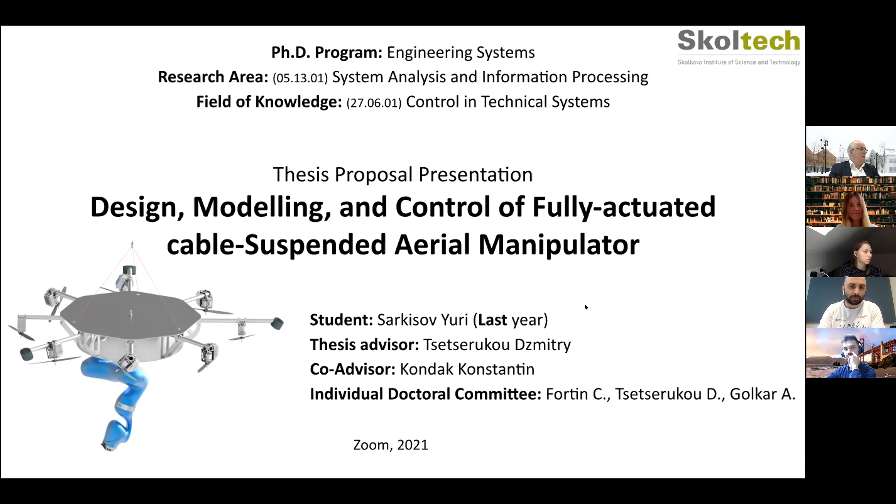So hello, my name is Sarkisov Yuri. I am a last year PhD student in engineering systems. My thesis proposal we will discuss today, and the topic is design, modeling, and control of a fully actuated cable suspended aerial manipulator. The presentation contains 2 main blocks. First, we will discuss questions related to the existing solutions. In particular, we will discuss the problem itself, research question, reference model, and relevant areas. And in the second block, we will discuss my approach and hopefully the impact it will make on this field. And in the end, I will conclude the presentation.

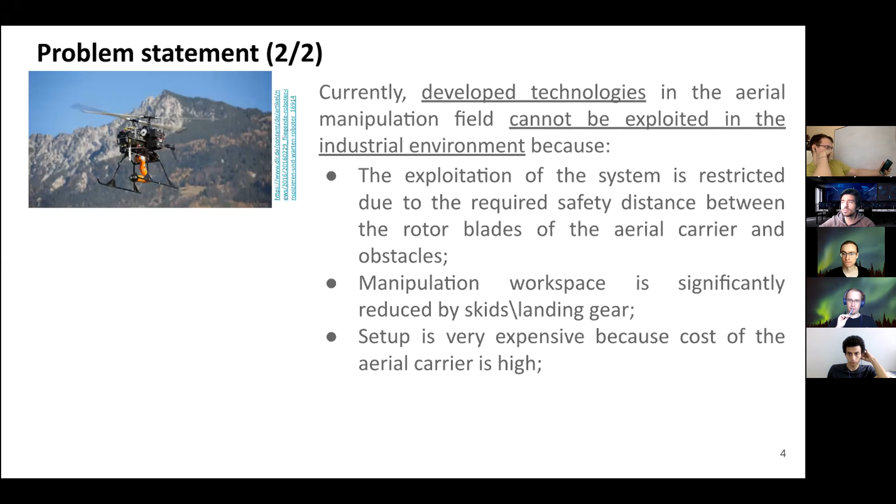And in order to solve this issue, there are different prototypes developed in the field of aerial manipulation. Let's have a look at them. First, it's this autonomous helicopter with an attached robotic arm. It has a couple of drawbacks. First of all, exploitation of such a system is restricted due to the required safety distance between the rotor blades, the diameter of which is 4 meters, and obstacles of the environment in which it operates. Secondly, the manipulation workspace is super restricted because of the skids of the helicopter. And lastly, the setup itself is very expensive because a middle scale autonomous helicopter costs a lot.

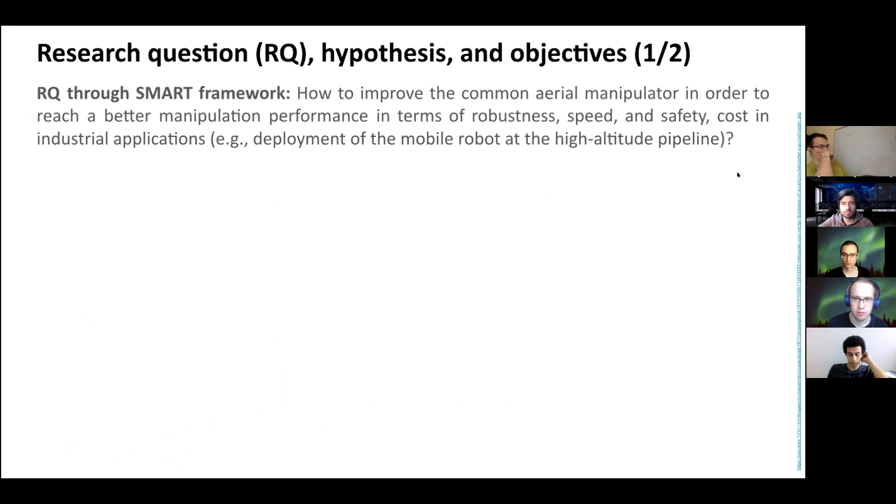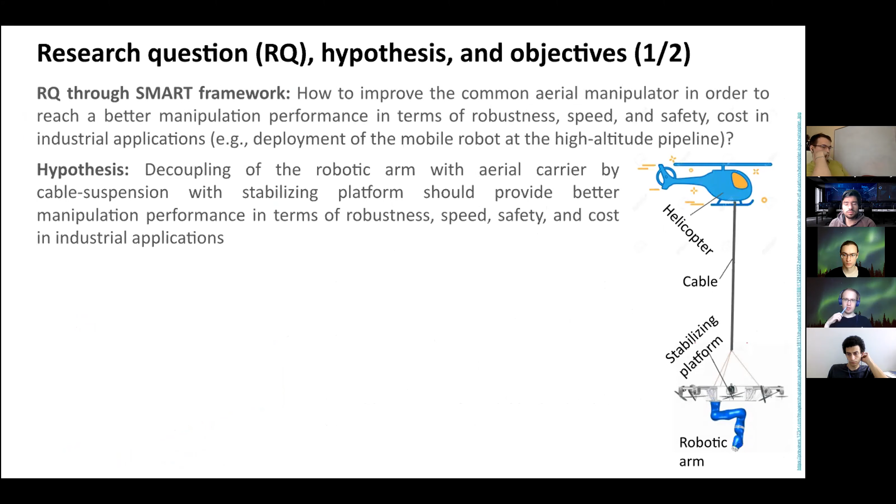And to this end, I would like to formulate my research question as follows. How to improve the common aerial manipulator in order to reach better manipulation performance in terms of robustness, speed, safety, and cost in industrial application, on the example of deployment of a mobile robot at a high altitude pipeline. And my hypothesis here is that the solution might be decoupling the robotic arm from the aerial carrier by cable suspension with some stabilizing platform, which should provide better manipulation performance in terms of the parameters I mentioned above. And there are several research sub-questions. They are mostly technical and related to how to model, how to control, how to develop, how to design such a system.

Yeah, and I would like to define several research objectives. First is to develop, investigate, and test performance of such a system, relating to certain requirements which are compliant under industrial conditions. Secondly, to model, simulate, and design a control system for certain technical conditions. Then, to compensate for both static and dynamic disturbances by separated actuation systems in some smart, coordinated, centralized way. Lastly, to analyze and compare performance of the received solution with the existing one.

Okay, my reference model, modified from my experience, will look like the following. I define the key factor as the reachable complexity of the task. As I mentioned above, there's interaction, and we would like to operate with manipulation capabilities.

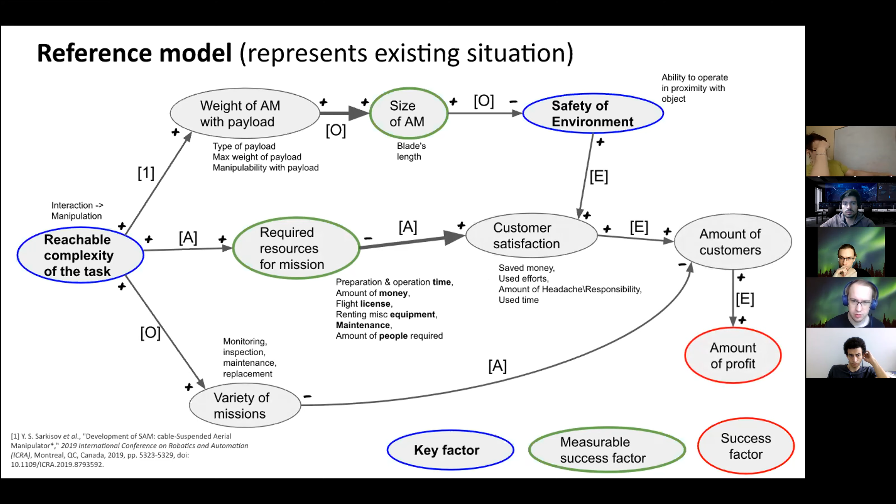As a recommendation from Clement and Nastya, I might replace the marketing part with something we'll call effectiveness of the robot, which is more technical in my case. But in the end, it's about total performance of the system.

Okay, let's discuss the relevant areas. My research is on the border of different disciplines. First of all, there's control strategies, which include different model predictive, adaptive, nonlinear control approaches. Secondly, it's design and development of the systems. Thirdly, it's aerial manipulation itself, because the approach I propose is a type of aerial manipulator. And lastly, there are some connected topics which are similar but not exactly the same.

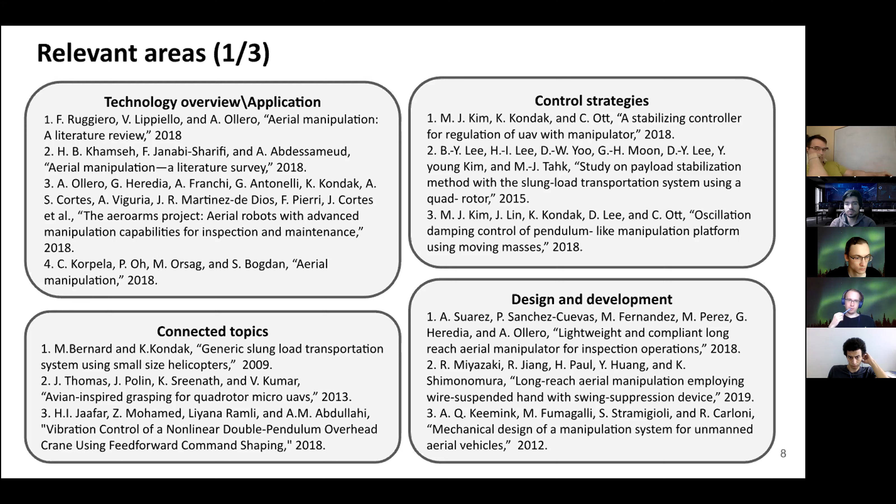For example, slung load transportation by some aerial vehicle. Let's speak about manipulation a bit. There's interaction as a general task, and as a part of interaction, we can define manipulation. Manipulation can be fixed base, like industrial robots, or floating base. Floating base manipulation at the Earth environment versus gravity, we call aerial manipulation.

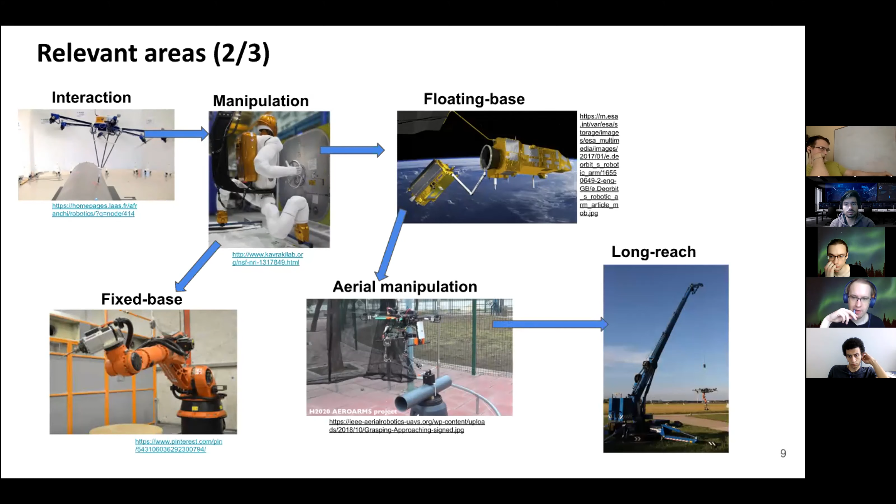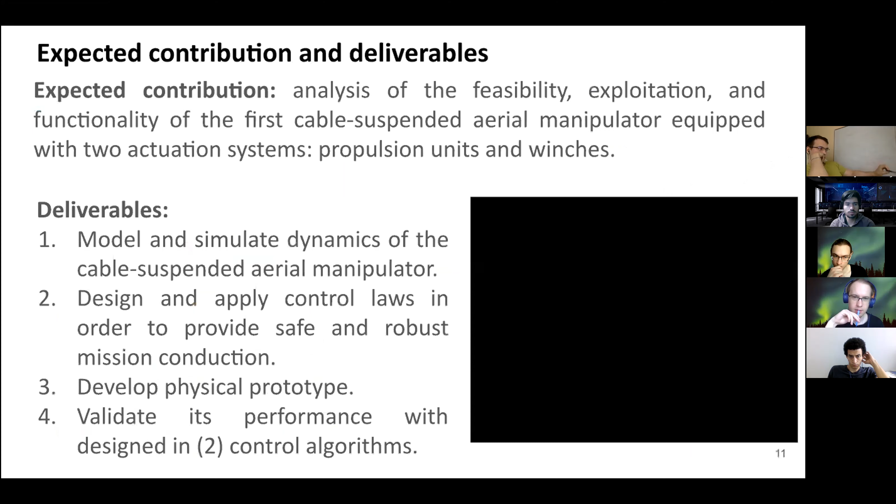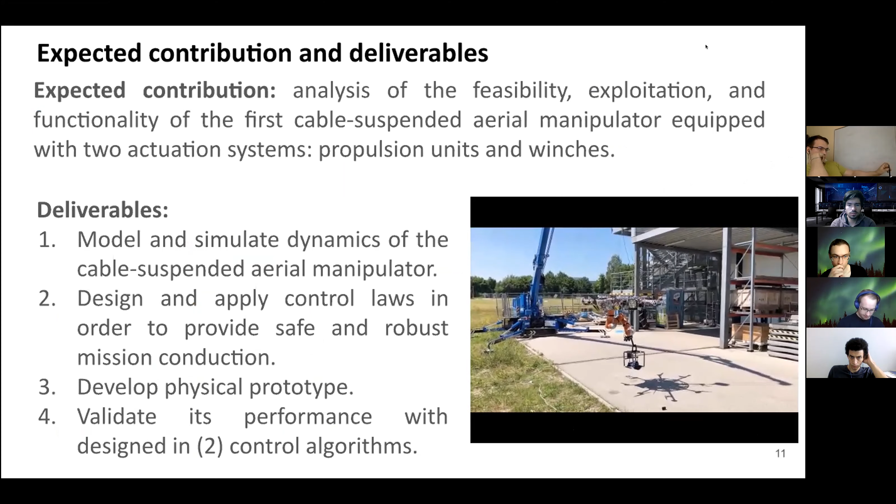The expected contribution of this work will be the following: analysis of the feasibility, exploitation, and functionality of the cable suspended aerial manipulator equipped with two actuation systems, propulsion units, and winches.

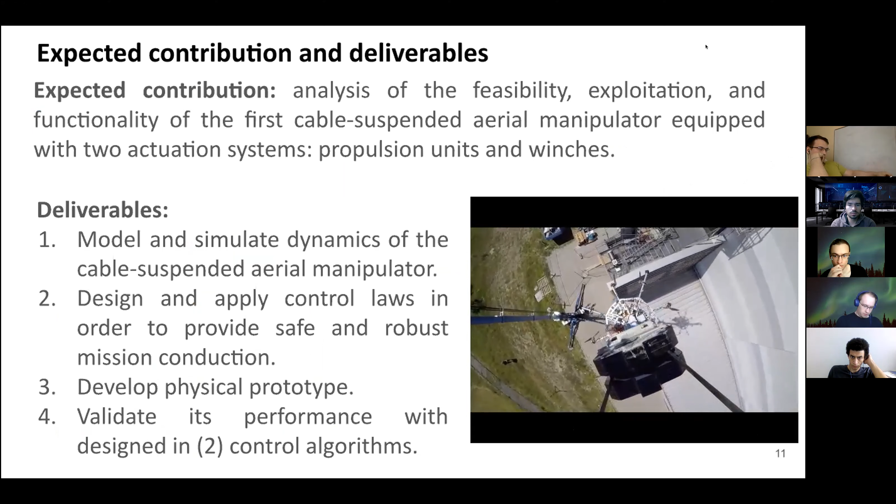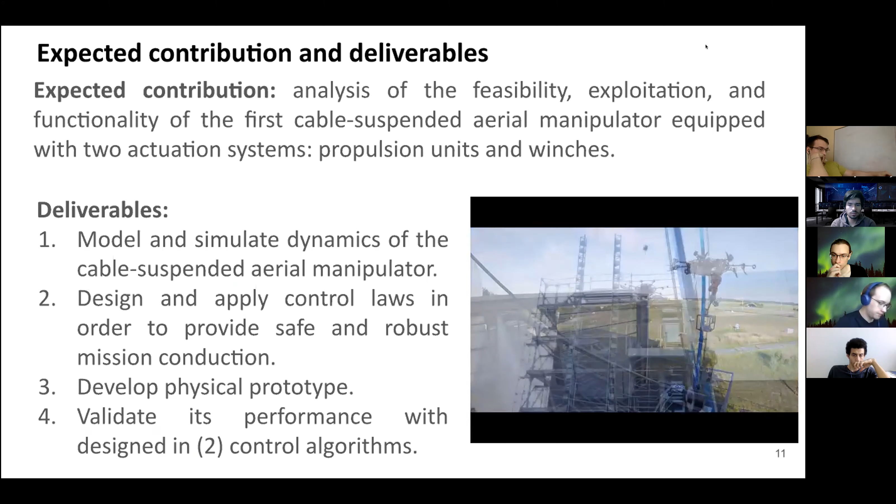So the video basically shows last year's experiments with some draft controllers, but in the end, what we want to reach is this status. We want to perform a mission which is surrounded by obstacles, by a fence, and deploys a mobile robot. The deliverables of my research will be modeling and simulation of the dynamics of this nonlinear, highly redundant system, design and applying of control laws for this system in order to perform the mission robustly and safely, developing a physical prototype, and validating the control approaches at the mission.

My research design methodology is different at different steps and different levels of my research. During research clarification, I use literature analysis and empirical data analysis based on the previous experience of my colleagues. During descriptive study 1, I used modeling, numerical simulation, prototyping, and experimental investigation. During prescriptive study, I did theoretical work, modeling, numerical simulation, prototyping, experimental work, data collection, and analysis. And during descriptive study 2, which is going on right now for me, I do numerical simulation and experimental work as well.

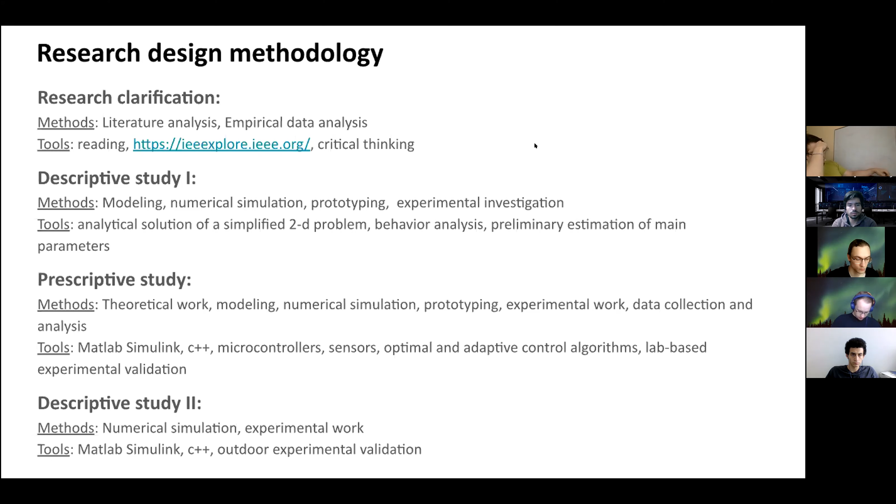Actually, it will modify some links. As you can see, increasing complexity will no longer require increasing of required resources for the mission, because instead you will have to just replace the tool, so we can get rid of the previous one. And as a result, it will increase customer satisfaction.

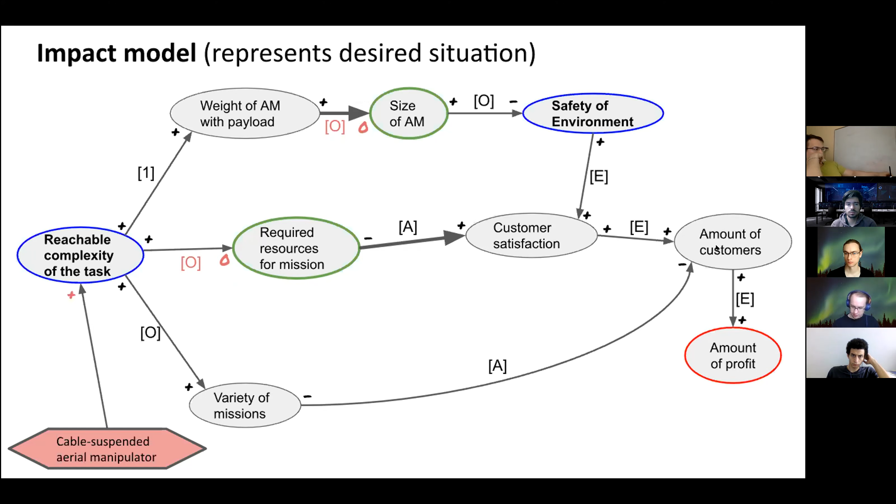And secondly, using the cable suspended aerial manipulator will not require increasing the size, because actually the weight is compensated by the crane or some aerial vehicle like a helicopter, which can carry as much as we need without increasing the size of the platform itself. And it will lead to the safety of the environment, and as a result, to the customer satisfaction, or to the effectiveness of the performance of the system.

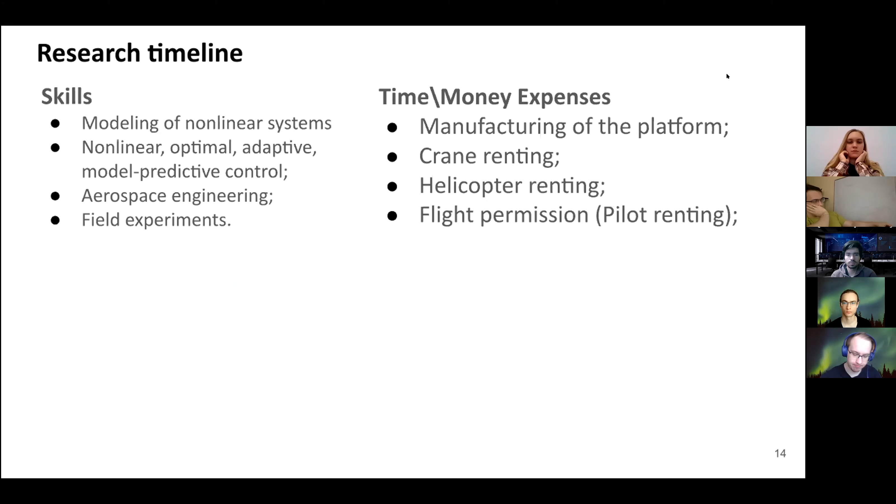Regarding the research timeline, there are different skills I had to acquire to perform this research: modeling of nonlinear systems and different types of controllers, and engineering of high-tech robots and field experiments, which also takes some effort. In terms of time and money, expenses for manufacturing the platform, crane renting, helicopter renting, and flight permission is mostly what we had to pay for.

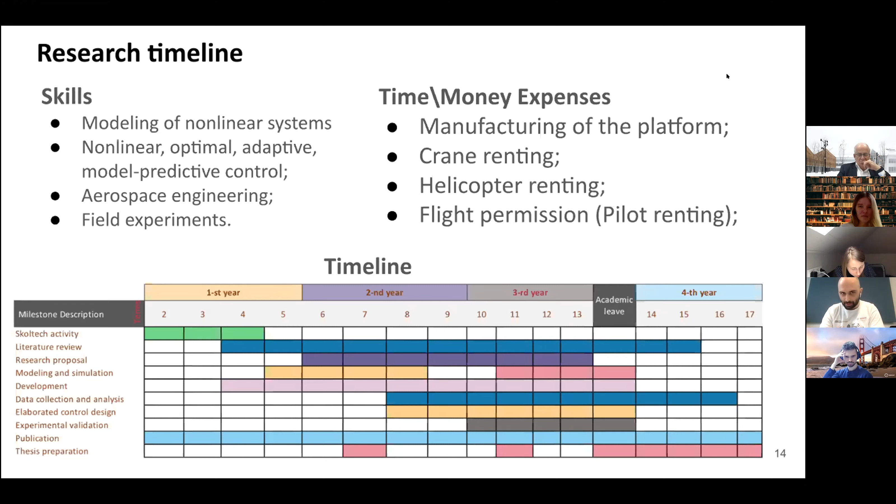Let me conclude this presentation. The thesis proposal is aimed at the design and investigation of a novel concept in the aerial manipulation field. The research hypothesis has great potential to bring aerial manipulation closer to industrial applications. Specific objectives and research plan are defined, and a reference and impact model for the proposed research topic are designed. I didn't put any results to be at the same level, but I hope what I've shown is enough. Thank you for your attention. I'm ready to answer any questions you might have.

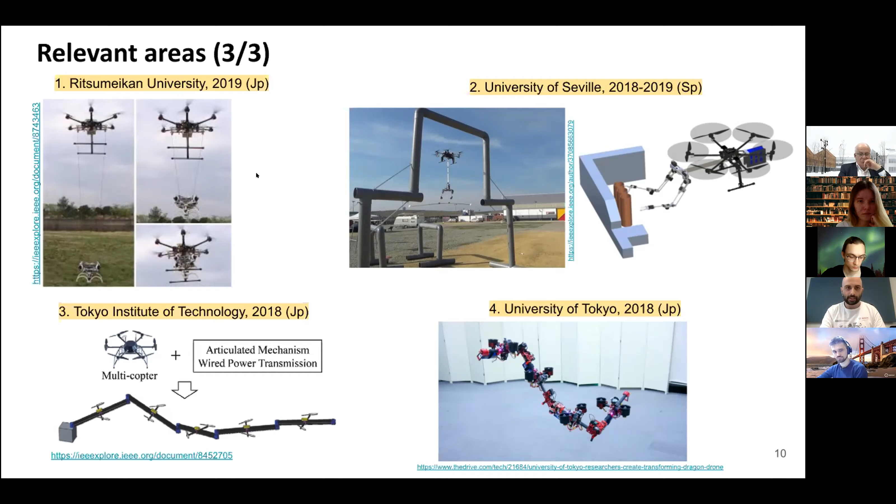What I find in your reference model is that you have weight, measurable size, and the task. What do you mean by the size of AM, aerial manipulator? AM stands for aerial manipulator. Okay, size—what do you mean by size? Actually it's specified right below the figure, you can see I meant the blade's length.

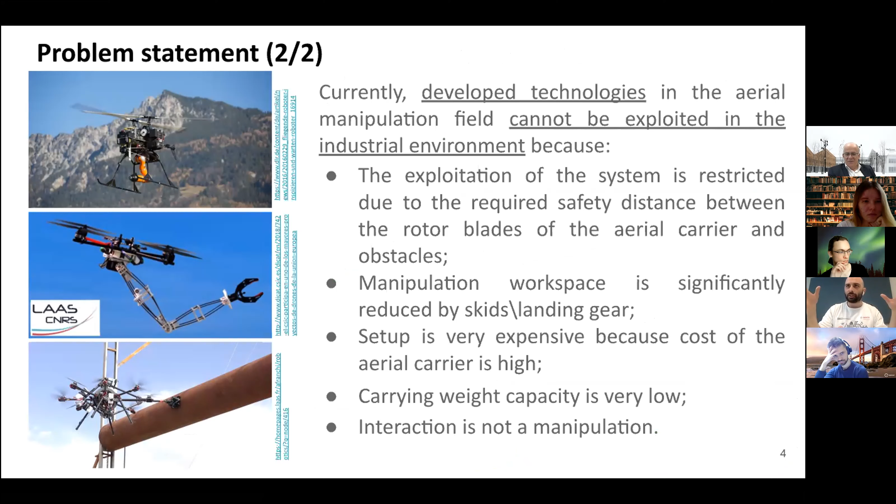As I mentioned at the beginning of the presentation, blade length is measured by diameter. For example, at this helicopter in the top left corner, I can measure the diameter of the blades, and it's super long—like 4 meters. Because of that, the size of this aerial manipulator is super huge, and it's not applicable in industry because it requires some distance between the UAV and the operational point.

Okay, you see that as a negative—go back to your reference model. Actually, it's not just my view, it's a view from industry; it's something we get as feedback.

My comment is that it seems too high level. Don't mention... if you take your objective, what is your real objective? I'm going back to Dennis' question. I think you're hiding your real objective. I think you have a very precise objective. I think that you're looking, and you say it when you talk, that it's a matter of maximum weight or load that you can carry.

The weight of the AM with payload, I don't think that's important. I think for you, what's important is what can you do. What Dennis is saying too is how much, if you have to turn a valve that's got so much resistance, this is a key factor. Is that not what you want to maximize, the capability of the remote manipulator? Is that not your goal, to maximize the capability? Yes, and actually it's defined as a key factor, the reachable complexity of the task.

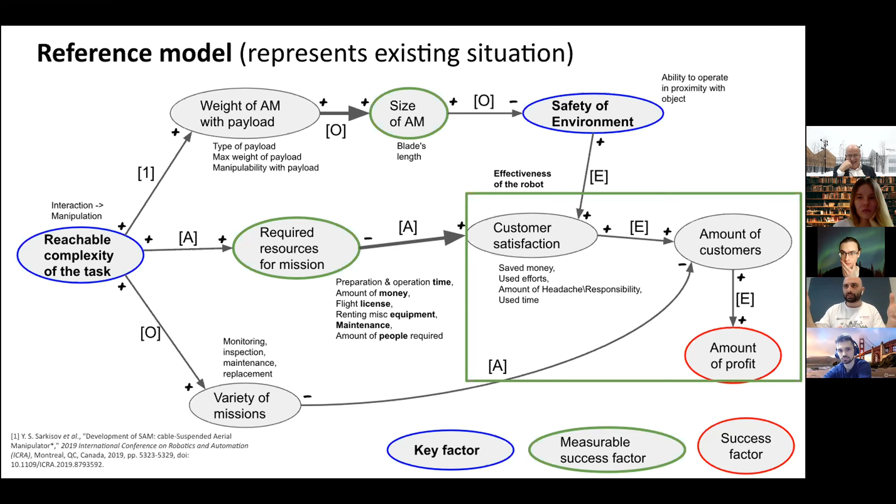But here, the capacity of the manipulation is the reachable complexity of the task, and the payload is in the weight of the aerial manipulator with the payload. We use the crane only for one simple reason: all industrial constructions we would like to work with are built with cranes, so essentially a crane can reach them. We don't want to fly far away, we don't need to, because a crane can reach every industrial site.

I understand this, but it's not the variety of missions. To me, you're attacking a very specific problem, Yuri. I'm just trying to better understand what you're trying to do, and I think it's a great goal. I agree, it's just that I think you can present it in a much more effective manner. I think the reason you take all those steps is because you want to do meaningful tasks, and it comes down to the reachable complexity of the task.

I don't know how to measure this. Tell me how you will measure reachable complexity. I would say at the super high level, we can define interaction and manipulation. Interaction is a low complexity task, and manipulation is a high complexity task.

But how can you measure this? What units? Always ask yourself, what are the units? There aren't like 1, 2, 3 units, but there's kind of low, middle, high level tasks. High complexity - how do you define them? Do they have degrees of freedom somehow? Maybe you can formulate it.

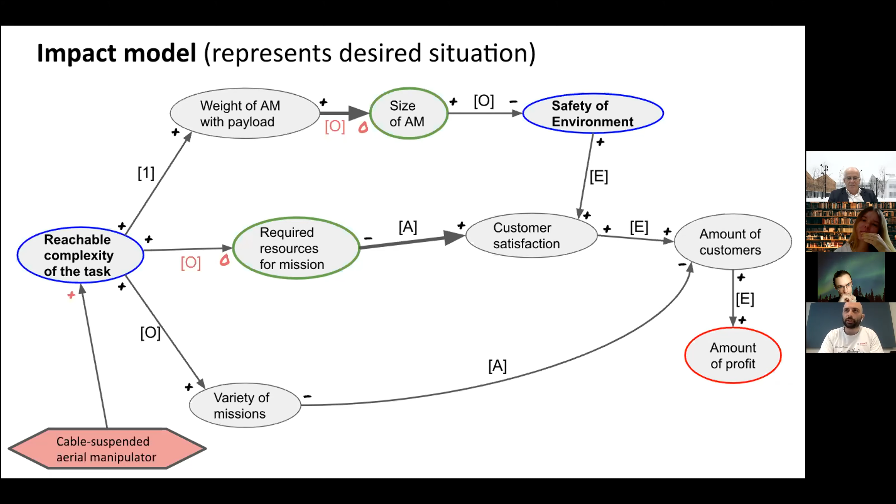But Ivan brought the measurable success factor very concrete. If you look at it, he can measure his success factor easily. I can also measure size of aerial manipulator and required resources - in my case, those two are success measurable factors.

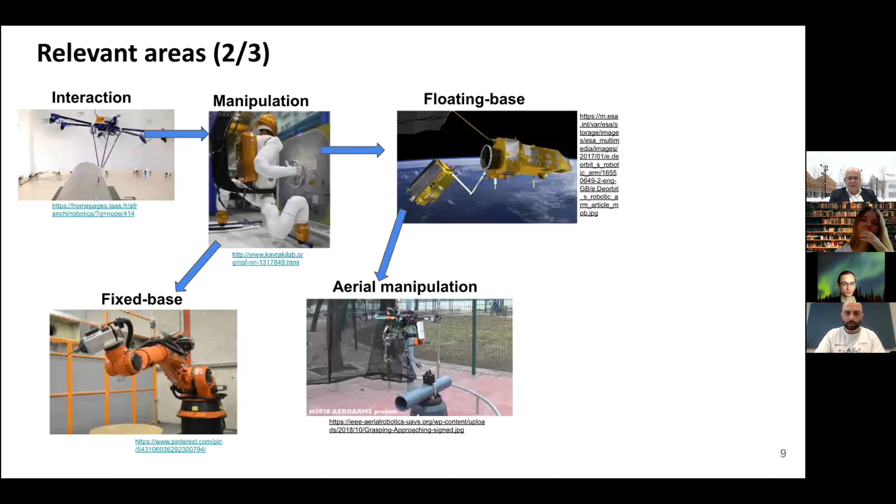Which one? What do you call success? Which one success? I will show you the reference model again. So they are in the green circles - it's the size of aerial manipulator, which is basically the blade length, and the required resources for the mission, which includes time, money, license, equipment, maintenance, and amount of people.

Those are two measurable success factors which define the effectiveness of the robot, which at least I measure in the scope of my research.

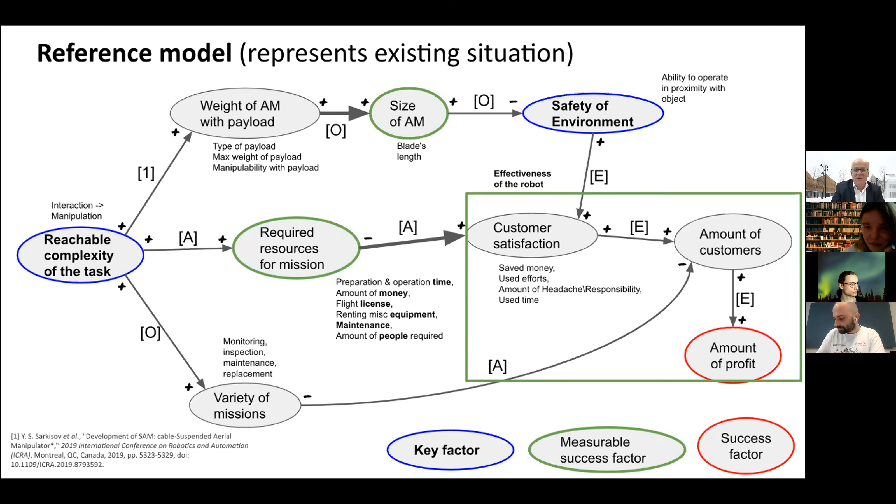Nope. So can you get back to objective slides, please? Slide. Yeah, I reduced them based on your comment. Thank you. Yeah.

I'm not absolutely sure if I'm right, but looking at the third objective, then you state, you formulate it in a way to compensate by separated actuation systems coordinated by a centralized control framework. It makes me wonder if it is too narrowed down to a solution once again. As far as I see, it's better in research questions and even in objectives to stay more open, not specify how exactly you are going to solve the task.

But if the professor had other comments, go for it.

Well, I don't know, I was thinking while you were talking. What you have is very, very interesting on these disturbances, by the way, Yuri. And I think that you could change, I would suggest that you change your safety criteria to one quantifiable directly with the disturbances. In safety, I would maybe have, or you replace it, or you have another one, but it's accommodation of disturbances, and it's very, very important. I agree with you, very, very important.

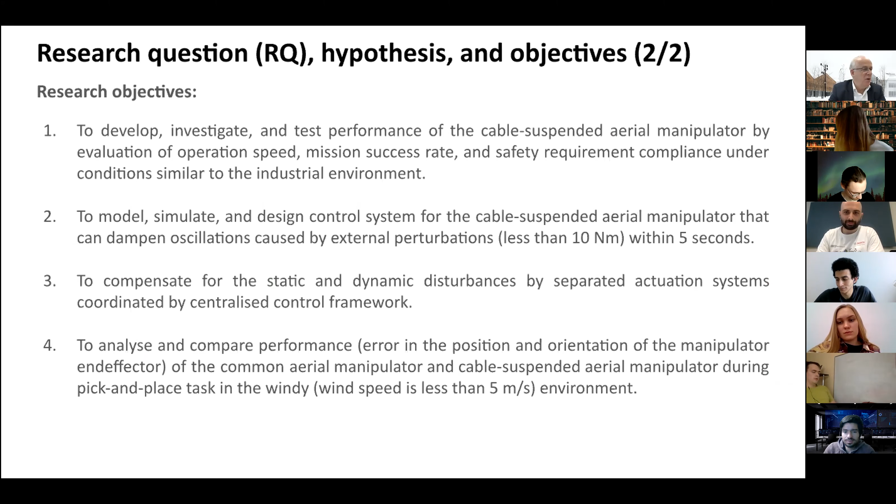Mm-hmm. So anyway, it's how to improve the common aerial manipulator. What's a common aerial manipulator? It's what was shown before. I started with a presentation of some existing solutions for the problem I defined. And these solutions I call the common aerial manipulator because they already exist and they're quite common in the field. Because as a rule, when you speak about aerial manipulation, people think about the drone with something attached. Oh, I see. So these are the ones, not the people doing inspection for washing windows or wind turbines. No, I meant these ones, which are here.

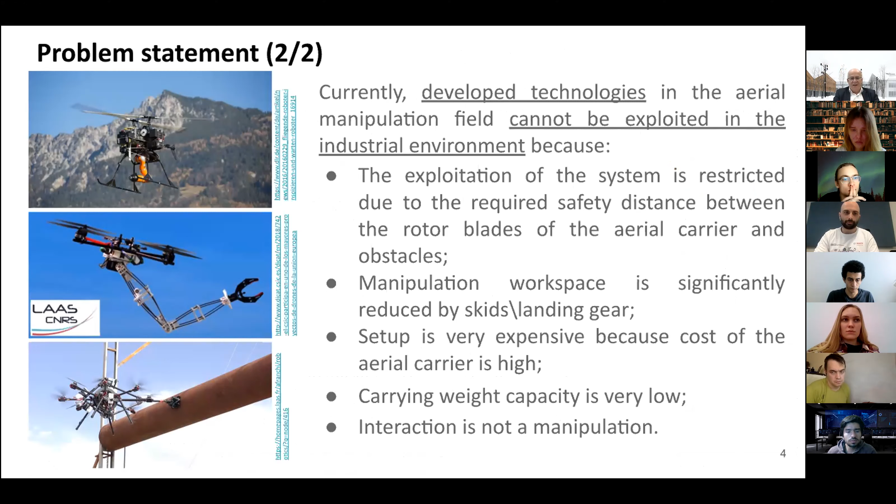Yeah, okay. They're not so common, that's what I would say. I would say how to improve aerial manipulators, because I don't think there's any common one yet. They're too new, I would say. No, 10 years old at least. Yeah. Okay, good. Thank you. I have a question. I would really like to know real applications of such a concept. Maybe there are one or two applications that really need such a concept.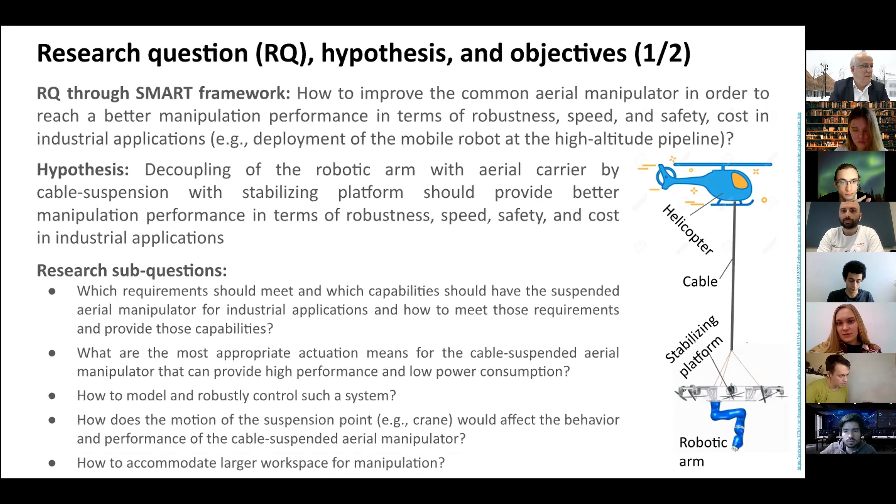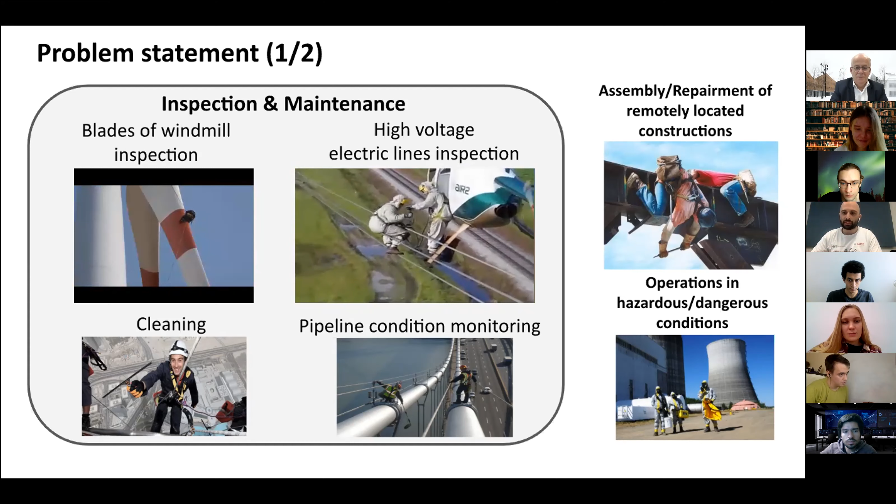Yeah, sure. Those ones, for example, which are presented here, like inspection of the blades of the windmill, or operation of, I believe these guys in the right video, there is a long video, like 10 minutes, but they replaced something at the power cables at the station. So they took something and they put something new. I don't know what it was, some detail, but for example, something like that. Or operations in hazardous, dangerous conditions, Fukushima and so on.

Not only cleaning. Yes, go ahead. There are drones without a helicopter. As we said, sometimes they're not super effective and they need more power and they can die very fast, something like that. But maybe I just didn't think about where you can implement such a concept, where you need a robotic arm and also long-time operation. Yeah, well, maybe such examples are good. Yeah, just wanted to clarify.

When you need a robotic arm, and okay, so you're not satisfied with those applications, you want something different? No, I'm satisfied with this, but I don't know. Currently, I'm also reading about implementation of UAVs, and there are so many applications, but I thought there is enough power now to do such a job, and a human pilot is not required, and I just didn't think about such concepts. Yeah, your examples are good. It's fine.

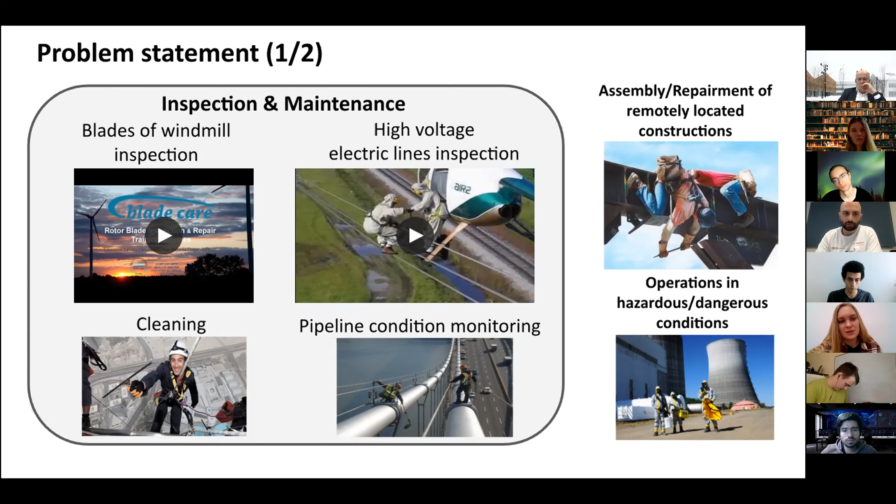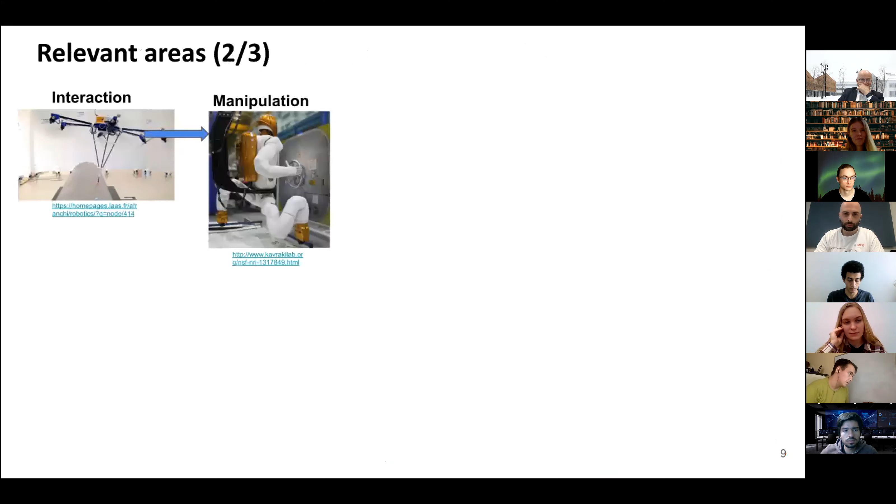Okay, I will give you one more. This mission I showed you is inspired by a real task. We communicated with a refinery, for Russian speakers it's like нефтеперерабатывающий завод. The problem was that they had a lot of pipes at really high altitude, and they wanted to inspect them, not always from the top, but sometimes from the bottom of the pipe.

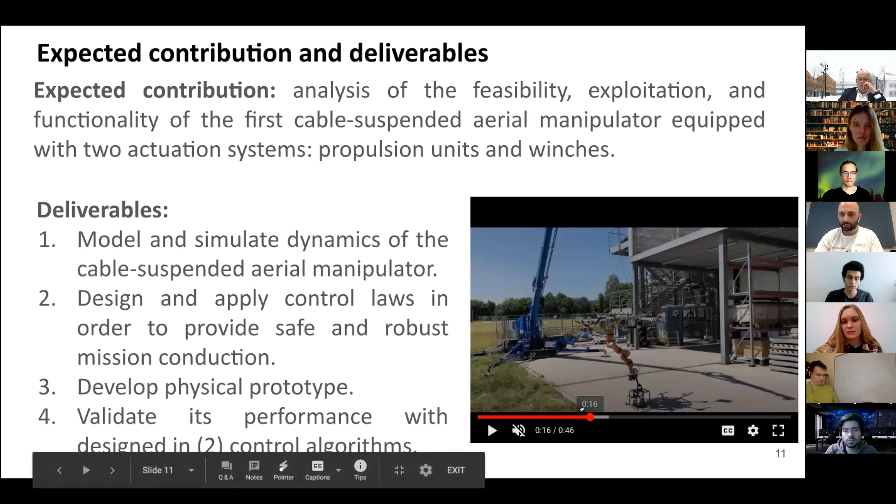To this end, they wanted to have a mobile robot, a real robot, which basically rides along the pipe, around the pipe, and so on. But in order to deploy it, for example, here you can see such a robot, you have to press this deployment cage. There may be different deployment types and maybe different tasks.

But in this case, there is a cage, and in order to safely deploy the robot, which has magnetic wheels, you have to really push the cage towards the pipe, else the robot will not go away. So you see that we push the cage towards the pipe with this hook, and only then can the robot go out safely without any issues. Yes, I see. In this case, you have to really hold and keep the specific tension. So there is a force torque sensor at the end effector of the arm. You press it with a specific force and hold it until the robot fully leaves the cage.

Yuri, can I ask you, sorry, Katerina, are there some patents involved in this? Oh, yeah, don't record this. No, I mean, we submitted a patent for the system.

The reason I'm asking, and it's a comment for all of you, is that I've seen some PhD theses with industrial or commercial applications, which makes the description very hard because you cannot say everything. That's why I'm asking Yuri if he's in this mode, because you have difficulty saying it. Maybe there are some things you don't want to say, or you feel totally free. I've seen some theses really restrictive on this, and it puts the poor guy or girl defending it in a very difficult position, and the jury members also.

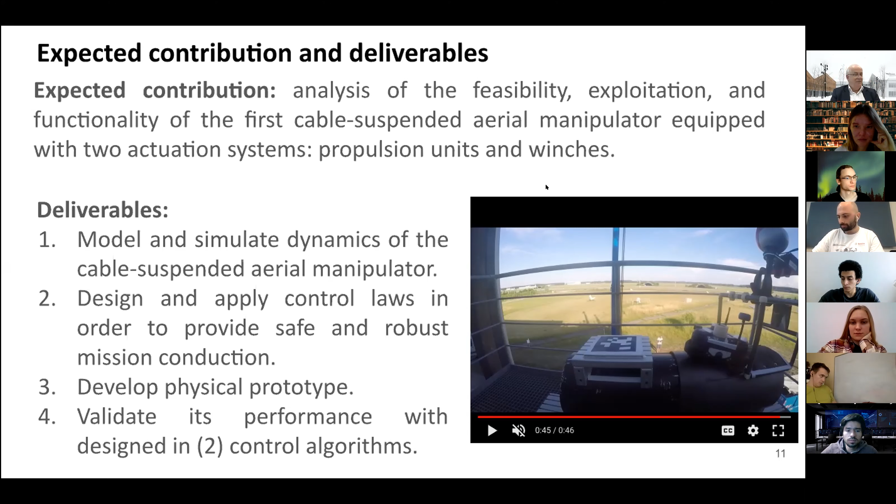All right. So I don't have any restrictions except a very detailed hardware description of the system. I cannot describe this, but otherwise it's open. Okay, good. Thank you. Anything else? Good. Thank you very much, Yuri. Thank you.

All right, so we'll take a 5-minute break and go to the next one. The next one is going to be Ilya. Is that Ilya, Anastasia? Who's next? Yes, supposed to be you. Okay, Ilya. So 5 minutes, Ilya, then we'll start. All right, so we're ready. Our 5 minutes is over, and I think Ilya must be ready by now.

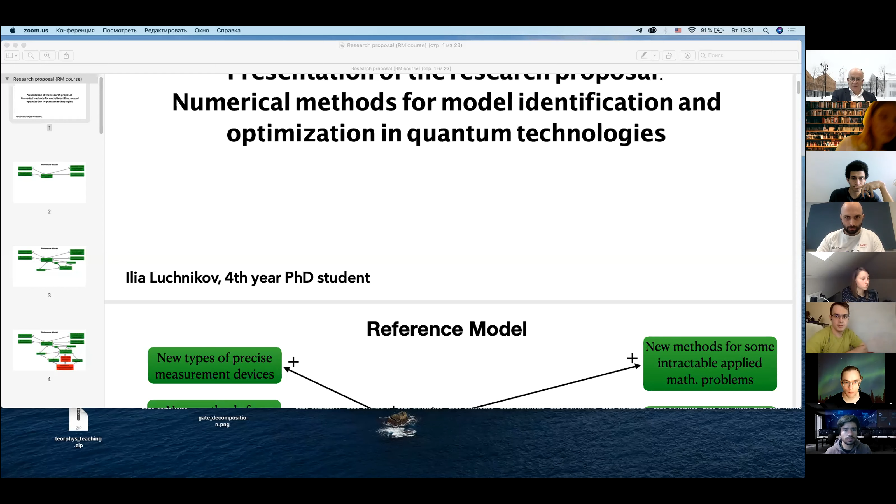Can you see my screen? Yes, we can now. I have two screens actually. With the presentation? We see your presentation, PowerPoint, I think, or something that looks like it. Okay. So let me start.

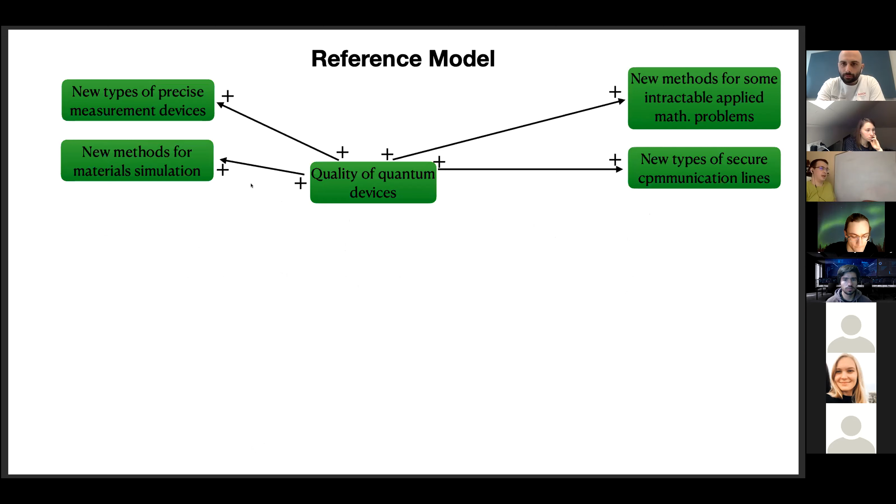Hello, everyone. Today I'll be talking about my research proposal, numerical methods for model identification and optimization in quantum technologies. I haven't done the impact model yet because I didn't have enough time, so I hope to do it in the written proposal by the end of this month. Let me start from the reference model. As I said last time, being able to manufacture high quality quantum devices opens a lot of new advantages, for example, in developing new types of precise measurement devices, new methods for material simulation, new methods for currently intractable applied mathematics problems, and new types of secure communication lines.

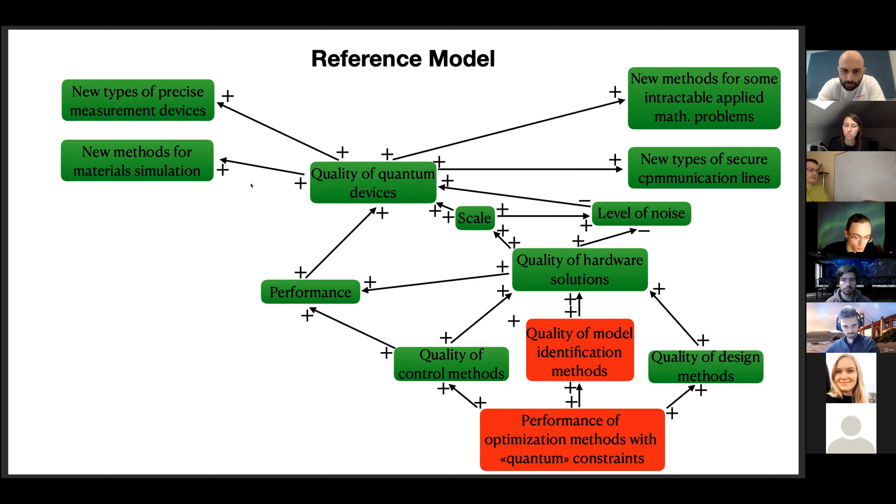However, the quality of quantum devices mostly depends on the quality of hardware solutions, while the quality of hardware solutions depends on various factors, including applied mathematics methods such as control methods, model identification methods, design methods, and in general, constrained optimization methods. Here I marked the key factors in red. These key factors depend on measurable success factors, which for optimization methods are scalability, efficiency in practice, mathematical guarantees of convergence, and probably most important, universality, because optimization problems in quantum technologies are very different, and it is very difficult to develop a precise optimization technique for each particular problem.

An additional measurable success factor for model identification methods is interpretability. That means that a model identification method shouldn't be just a black box. It should be a physical model that can be understood by a scientist, by a physicist.

So based on the reference model, I introduced my research question, that is, how can one develop a unified numerical tool for model identification, control, and design in quantum technologies? So I split this task. I divided this project into two parts. Each part is dedicated to two key factors.

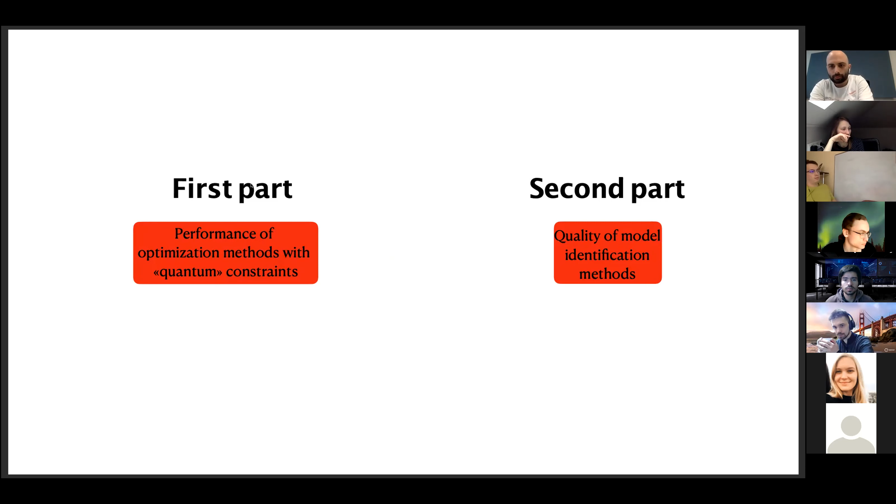The first factor is performance optimization methods with quantum constraints. The second key factor is quality of model identification methods. So my goal is to improve both parts, optimization and model identification methods. And I'd like to start from the methodology and from the hypothesis for the first part of my project.

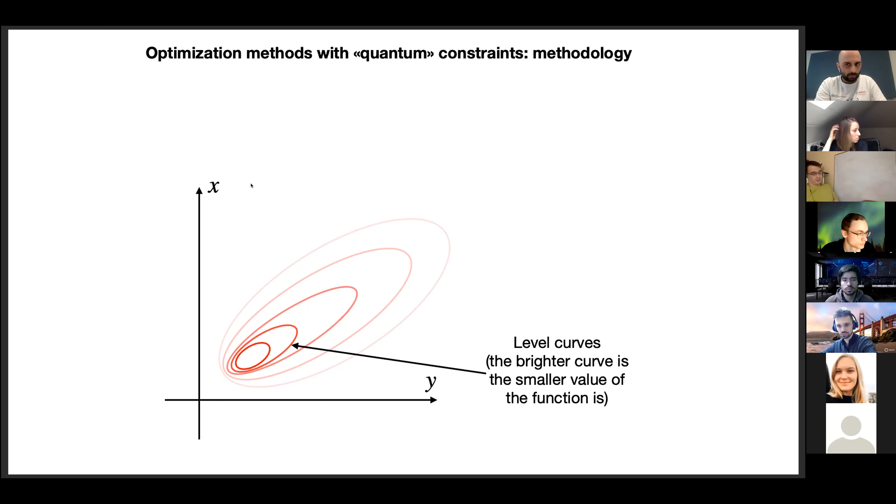And at this step, I need to introduce a hypothesis that typical constraints in quantum mechanics and quantum technologies form smooth surfaces. This is the basic hypothesis I use. And having this hypothesis true, we can address these problems using the very well-developed, universal and robust field of Riemannian optimization methods that are a generalization of standard gradient optimization methods on multidimensional smooth surfaces.

So here is a research plan that I followed in order to develop a general tool for optimization problems in quantum technologies. First of all, one needs to prove the hypothesis I introduced in the previous slide, i.e. that the typical constraints emerging in optimization problems of quantum technologies are smooth surfaces. This is a mathematical problem that I have proven. Then, having this hypothesis true, one needs to derive some Riemannian geometry primitives for all types of quantum constraints.

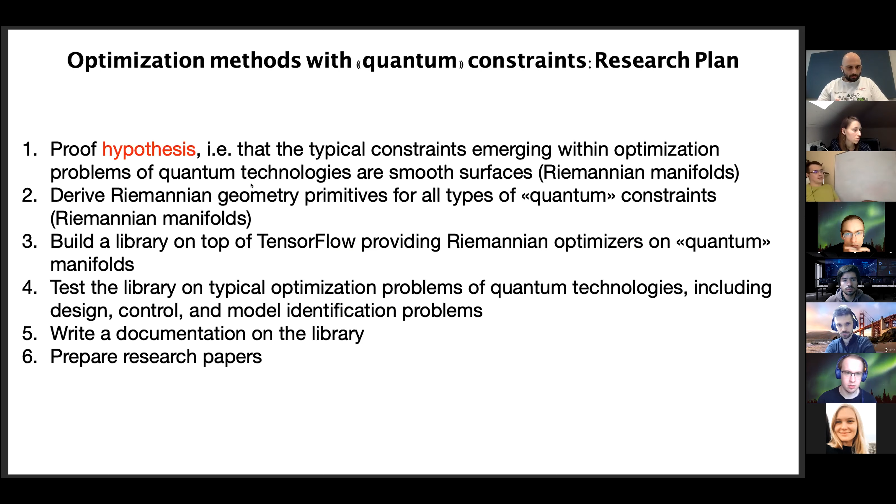On the next step, one needs to build a library for this purpose, built on top of some deep learning library. In this particular case, I have chosen TensorFlow for some reasons. And this library should provide generalized optimization methods on constraints that emerge in quantum technologies. Then one needs to test the library in typical optimization problems of quantum technologies, including design, control, and model identification problems. And the two last steps are to write documentation on the library and prepare research papers.

So this was the first part of my project. Now let me turn to the second part of my project that is dedicated to model identification methods. So before diving deeper into methodology, I need to introduce two important concepts: the concept of non-Markovian dynamics and Markovian dynamics.

So what is non-Markovian dynamics? Assume that we have some dynamical system like a human here. And this dynamical system evolves somehow in time. And at each particular step, before doing the next step, this system looks back on its prehistory, how it behaved before, and then looking on this prehistory, let's say looking on k previous time steps of its dynamics, it decides what to do next.

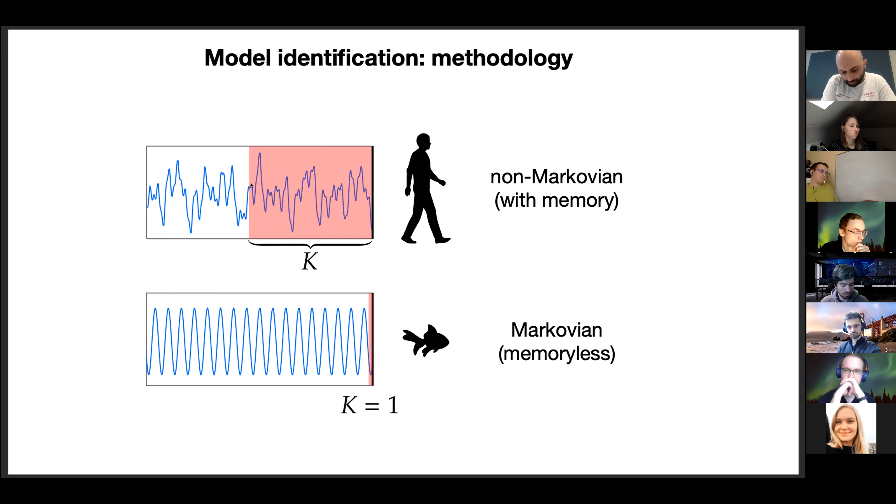So these two concepts are introduced, and it turns out that in real physical experiments, quantum systems behave like a human. They experience non-Markovian dynamics, dynamics with memory. The reason for that is that a quantum system interacts with the environment, and the environment takes the role of the memory.

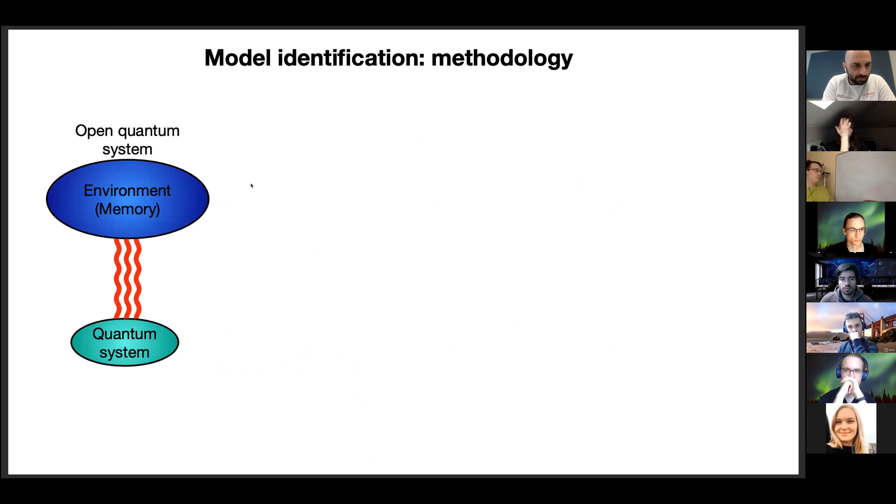It turns out that if we want to build a model of dynamics of the system with memory effects, it's a difficult problem because behavior is quite complicated. We can try to build the model based on data, identifying the model of the whole system, including environment and quantum system. But it is an extremely complicated task because the state of the whole system is extremely high dimensional and hardly can be simulated on a classical computer. Moreover, in usual experiments, the physicist doesn't have access to the environment. He cannot measure the state of environment or identify its model. So this problem is also complicated.

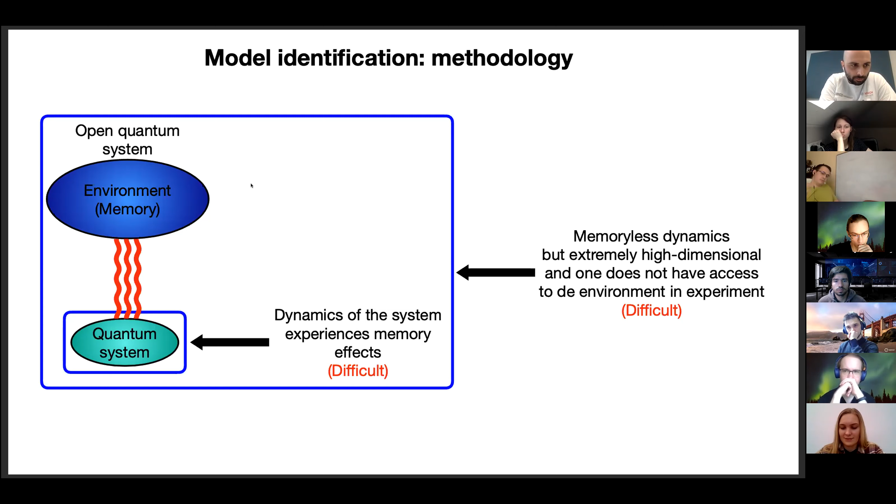One possible solution is to reduce the complexity of this task. Instead of a high dimensional full environment of the quantum system, we can consider an effective low dimensional environment, a low dimensional small memory that leads to the same dynamics of the quantum system. This trick is called Markovian embedding. In this case, we can consider dynamics of the whole system that includes the target quantum system and low dimensional memory. The dynamics of this whole effective model is memoryless and low dimensional.

Again, at this step, I need to introduce a hypothesis: that it is possible to reconstruct this type of model, the Markovian embedding, only from information about the system. We still don't have access to the environment. So let us skip this slide.

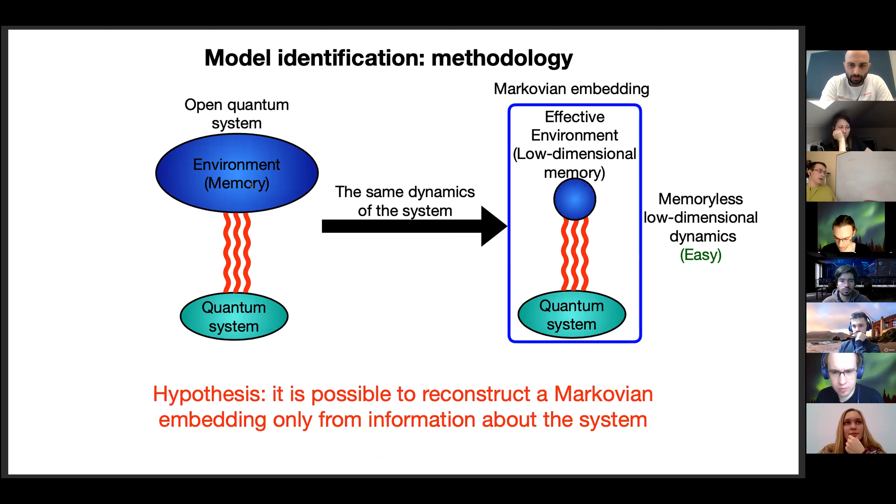Here is a research plan that I followed in order to resolve this problem. First, one needs to prove the hypothesis that it is enough to have information about a system in order to reconstruct an effective model of the environment. The next step is to design the appropriate method for embedding reconstruction, combining tools from applied math. We found probably the best one: a combination of an engineering tool called dynamic mode decomposition with special data preprocessing. The two last steps include writing the code, testing the method on typical examples of non-Markovian dynamics, and preparing research papers.

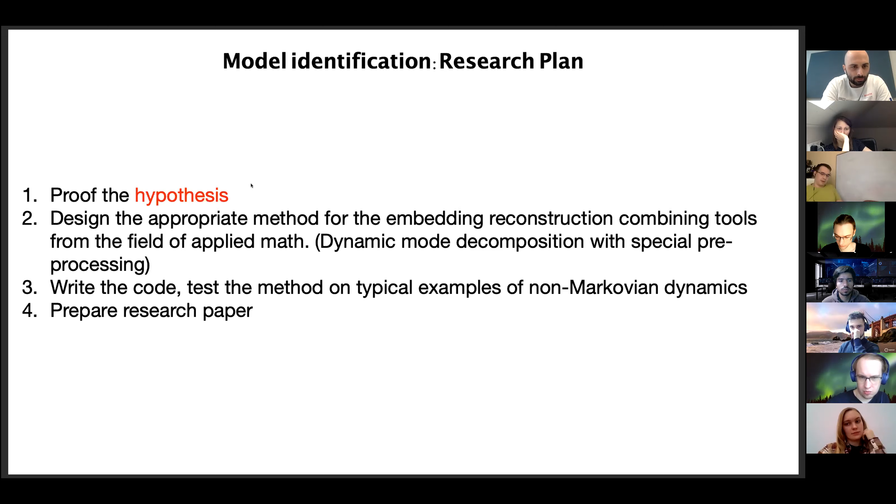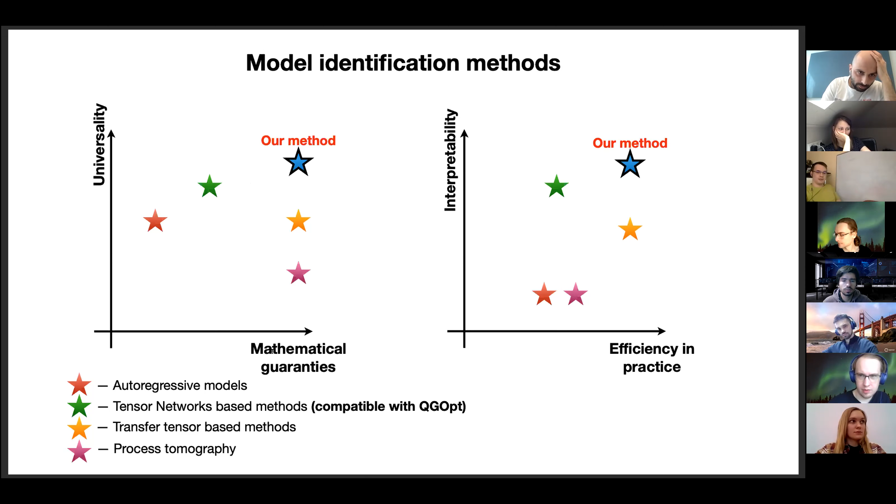On this slide, you can see the comparison of our solution with all previously developed ones. In terms of all key success factors, our solution is state of the art. We have proven it, not yet published, but we have proven it. It seems that it is one of the best solutions for model identification in quantum technologies. It is also very well compatible with the previous part dedicated to optimization in quantum technologies. Overall, these two methods form some kind of answer to the given research question.

That's it. Thank you for your attention. If you have any questions, I would be glad to answer them.

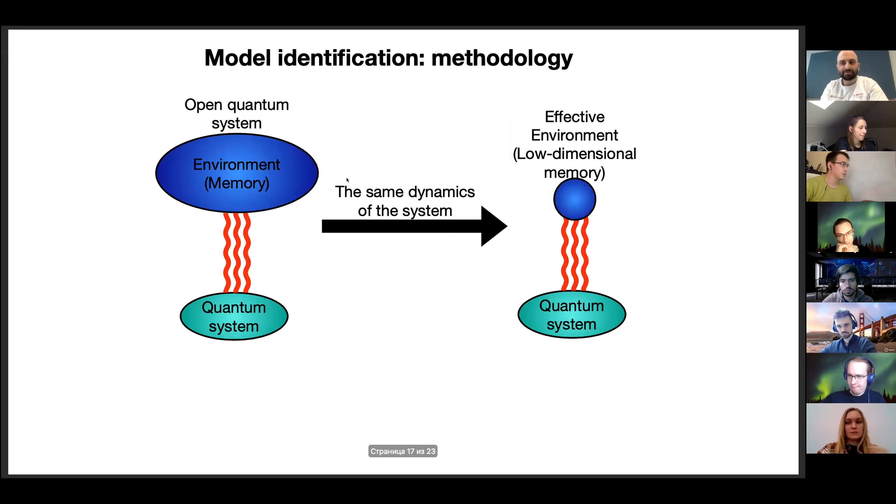Actually, they are related to each other directly. First, let's look at the first part. It's a very general tool that can be used to address control, design control methods, design methods, and also model identification methods. But we found that a particular technique can be much more reliable for model identification methods. It's like a T-shaped project, as Anastasia said last time. We have a very general tool for all the problems, and we also added a very high performance one that is a bit more narrow, more specific, but has very high performance. So they are very well linked and dedicated to the same general problem: design, control, and model identification in quantum technologies.

Okay, and when you say mathematical guarantees there, are you talking specifically about convergence or more general? More general in this case, because usually we have the statement that either the method converges to the global minima or not. But here we can think more broadly. Sometimes we have guarantees of global convergence — for example, for our second method, we have these guarantees. Sometimes we have guarantees of convergence to a saddle point. That's not enough usually to design a completely reliable tool, but already good for some practical purposes. So the whole field of deep learning actually relies on convergence to saddle points, to local minima.

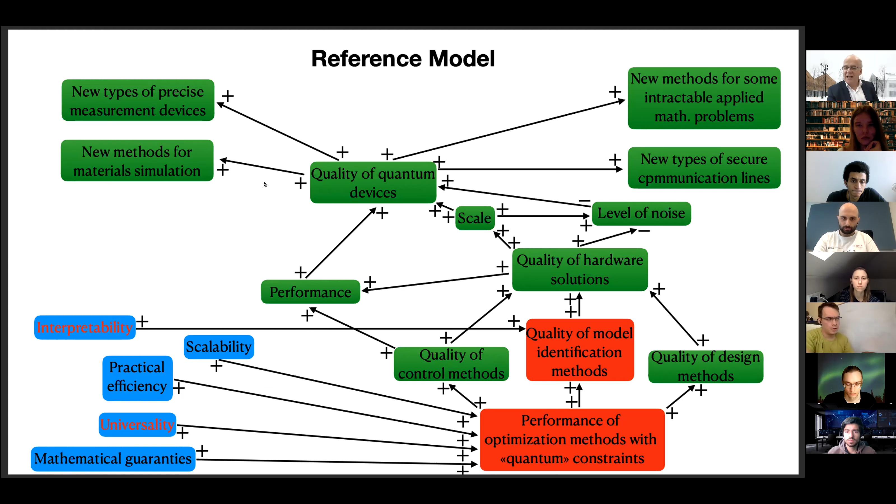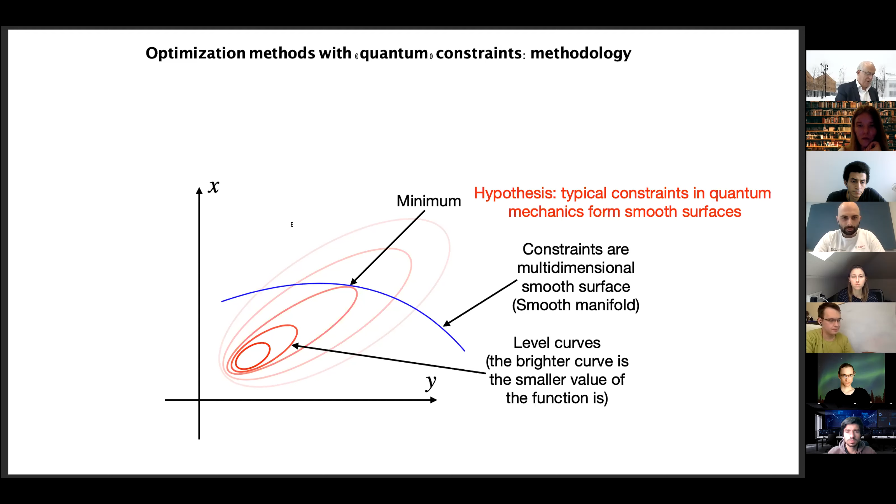I think you're looking forward to seeing your final proposal. I like your reference, it's clear. My only comment is about the link, because when you started the second part, you began with a hypothesis which appeared to me to be disconnected from the first part. You just need to make a link somewhere. The way you answered was very good, by the way. Okay, thank you, I'll do it.

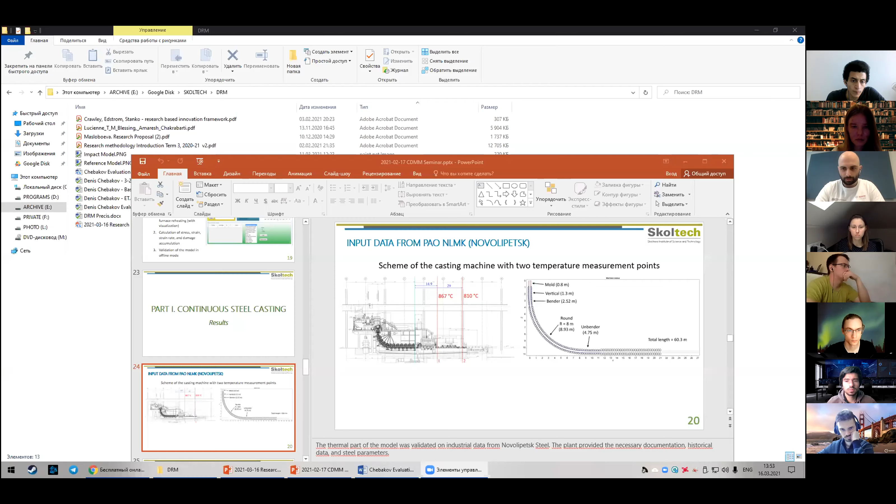Good afternoon, dear colleagues. My name is Denis Chebakov. I'm a third year PhD student of engineering systems, and my research is devoted to the development of a control system for the continuous casting process.

The continuous casting process is the first and main stage of the modern steelmaking process. Here you can see the scheme for the continuous casting machine. Molten steel is poured from the ladle to the tundish and then distributed between several molds. The mold provides the primary cooling of liquid steel, which results in the formation of a solidifying shell.

Then the ingot passes the secondary cooling zone with water sprays, moving by the roll supports, and finally solidifies. In the end, the slab is cut off in the cutting zone. Further, the slab moves to the stock where it cools down and awaits further processing. Then the slab is reheated in the furnace before further processing, for example before hot rolling. Finally, we get the final product in the form of steel sheets or steel rolls.

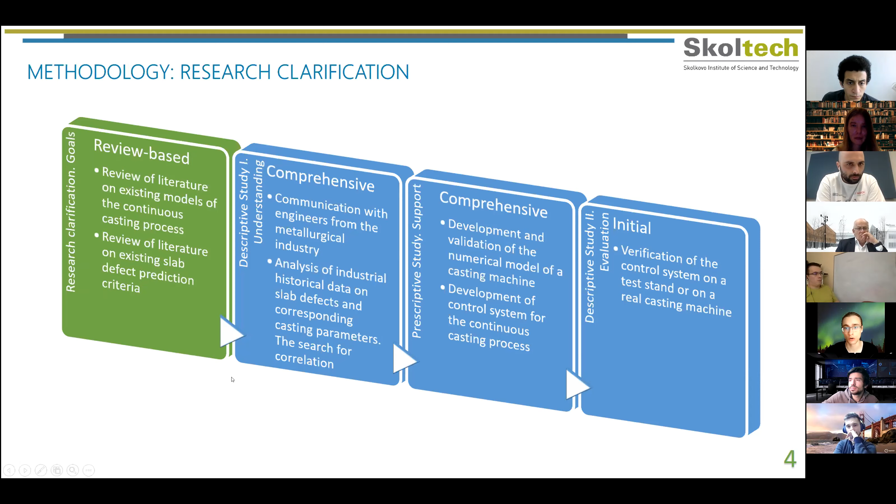The intensity of water flow increases the rate of solidification of an ingot, and according to the literature sources, the rate of solidification increases the amount of damage accumulation, which causes cracks. However, at the same time, the rate of solidification, when increased, decreases the segregation of alloying components at the same time. So obviously the number of cracks and the amount of segregation decrease the final quality of a slab and the quality of the final product respectively.

So here we must somehow find the optimal intensity to minimize cracks and minimize segregation at the same time. There are also other defects which affect the quality of a slab, which are outside the scope of my research. The measurable success factor for me is the amount of flawed product we get finally.

So the next step is the descriptive study part 1. For me, it's comprehensive. During the first and second year, I'm constantly communicating with different engineers from Russian plants and analyzing the industrial historical data on slab defects and corresponding casting parameters. Our team receives this data directly from different Russian plants, for example, we are working with data from Novolipetsk Steel, Severstal, and Evraz.

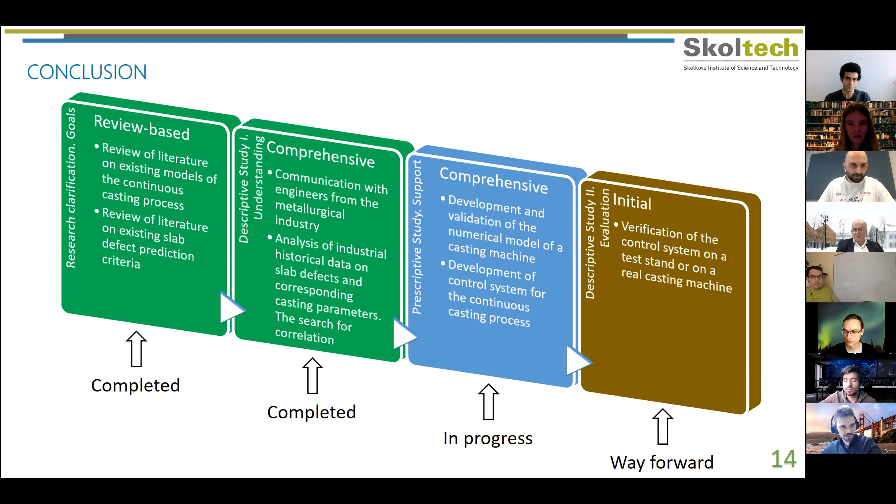So you told this assumption - this is an assumption, but I thought it was kind of a proven fact. Probably you have proved it. Where have you made this assumption from? Does this follow from historical data? The temperature gradient in the Z direction is much less than in the XY direction. Does it follow from historical data, or why have you picked this assumption?

I understood it. So we have two reasons. The first is that it's quite obvious that the dimension of the cross-section, which is for example 0.25 meters up to maximum 2.5 meters, is much less than the total length of the ingot. So thus the ingot will solidify slower in the Z direction than in the cross-section, so the solidification front will move much slower.

That's the first part. And the second part, of course, during my research I've already received this question, so especially for this I carried out another computation where I considered the complete 3-dimensional ingot, and the results were very similar to each other. So comparing to the 3-dimensional scheme, the accuracy of the 2-dimensional scheme is approximately 95%.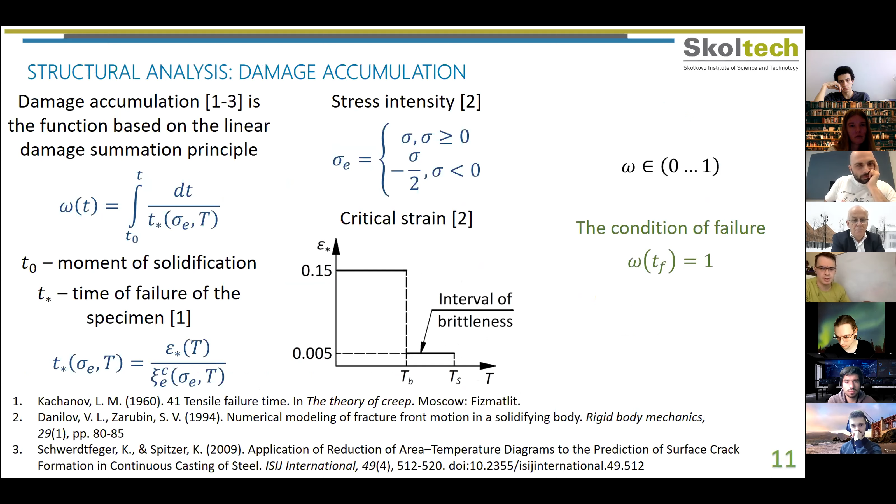Okay, could you please go to the optimization part where you optimize some function? So this is the objective function, right? But with respect to what set of parameters do you optimize this function? Well, what is the parameter?

Yes, just as an example, I showed here the Nozaki formula. This formula is unique - the coefficients of this formula, C1, C2, and C3, are unique for each particular casting machine, so they are determined for each casting machine respectively. So each time we implement our control system on a plant, we will have to validate the model based on historical data - for example, temperatures at certain points of the ingot that we measure with pyrometers, and the front length.

So this set of parameters is used in this Nozaki formula, which represents the dependency of the heat transfer coefficient for the boundary conditions and the physical water flow in nozzles. And you perform optimization over these parameters? Yes. So you try to find the best set of parameters. Okay. Yes. But it is not the only set of parameters. I can introduce other parameters if these three are not enough for me.

No, I just asked the question because you said optimization problem, but didn't introduce the set of parameters, constraints, just only the function. So I asked what the parameters are, what the constraints are, and so on, but it's okay. I see now. Well, the set of constraints can be obtained from previous experimental data. For example, we know that C3 must be less than 0.01, that C1 must be between 1,000 and 10,000, etc. So the constraints are also involved in the optimization problem.

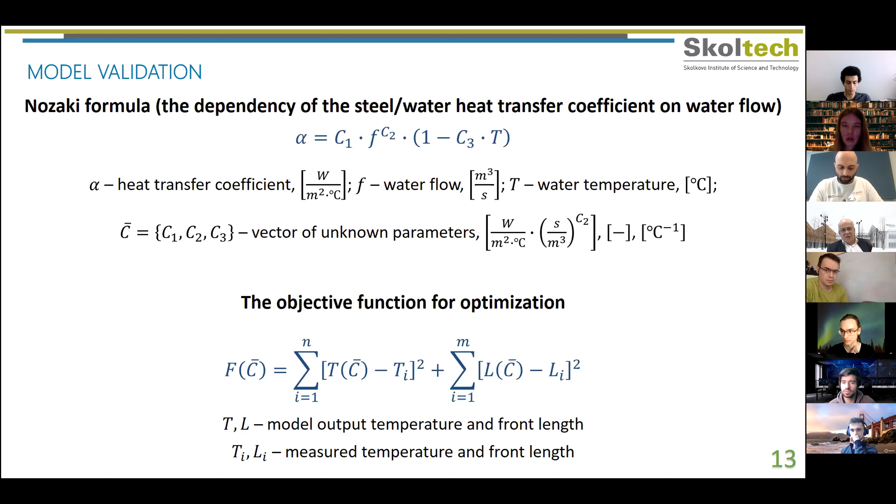Okay, very good. Go back to your reference model, because I just want to make sure I understand the control problem. No, the impact model.

What I understand from your impact model is that you don't control the initial intensity of the water flow, right? No, I control the intensity of water flow. So I tried somehow to show it with this dashed line. So, but then what do you call secondary cooling and primary? If there is a secondary cooling, there must be primary. I understood that the intensity of water flow at the bottom is your primary cooling, and you have secondary cooling.

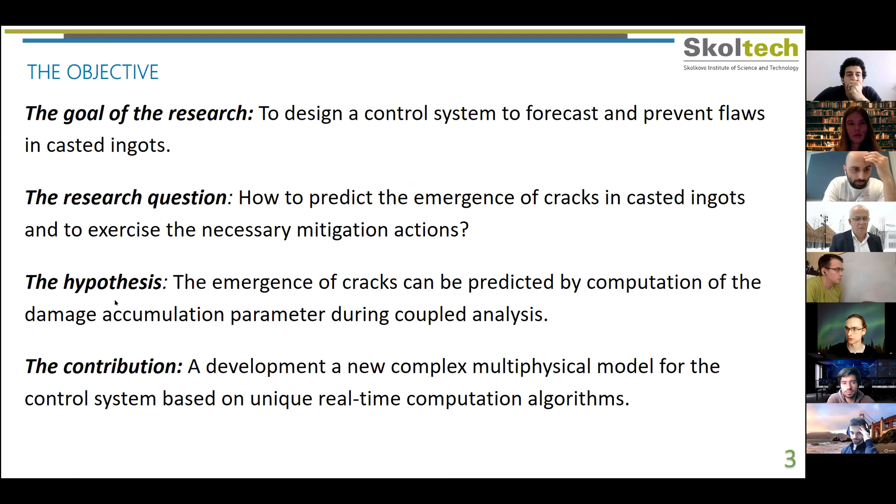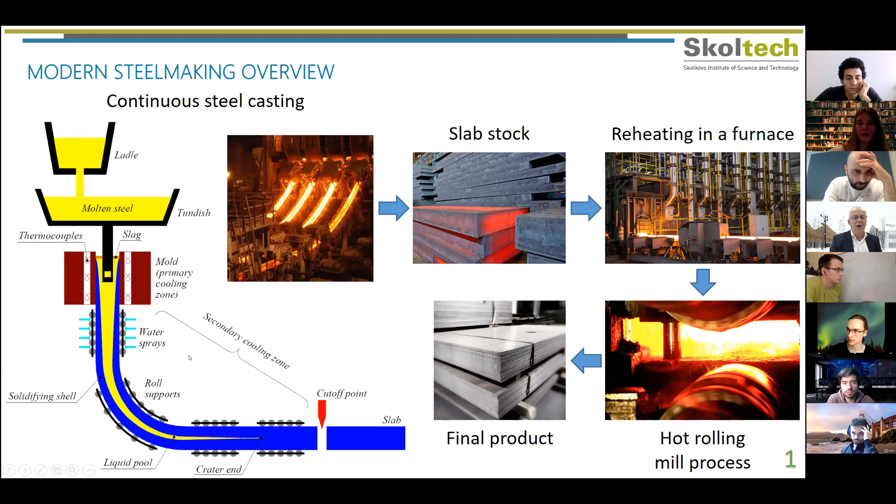Oh, no, sorry. Maybe it's my mistake, and I didn't mention it, but I'll show it here. In terms of continuous casting, the primary coolant is the coolant in mold, and we can't control it. We can't control the water flow in mold. It's always constant, but we can control the water flow in the so-called secondary cooling zone. So by secondary cooling, I mean the secondary cooling zone with the water sprays, where we actually control the water flow.

Okay, so in your reference model, the impact model, that should be quality of secondary cooling, but you need to make a link here between water flow and cooling somehow. I would put quality of secondary water flow, or I don't know how you would call it here. I saw the line, but you should have an identification of this line. So you're controlling, but what can you control? How many variables do you have on this control system?

I can control the water flow in any segment of the casting machine. Okay. And the volume, you can control the volume and the temperature? The temperature is the output factor of the volume. The volume of fluid, the flow level. Yes, the outflow per segment. The volume per unit of time. Yes, so liter per minute.

That's my only comment on your diagram, which is very good because you put the references and you have all the information there. It's just this that I see from your diagram. You just need to make sure that it's easily understood there. Okay, very good. Any other questions?

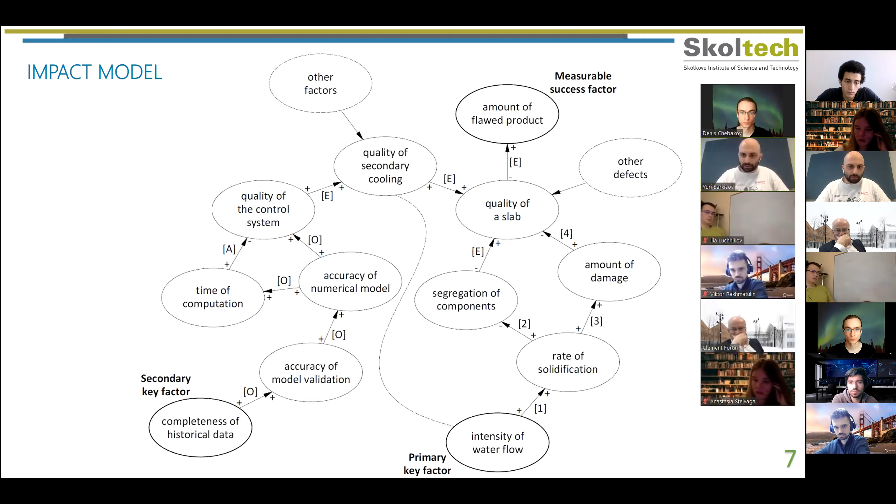Just a minor comment. I believe in your hypothesis, you mentioned coupled analysis, and I was questioning myself until the slide with this coupled analysis. The coupled analysis means that we carry out two analyses simultaneously. In my case, the thermal and the structural analysis. We compute temperatures, and on the same step of the solver, we compute the stresses and strains. The point is that you use this term in the hypothesis definition, and only at this slide you explained it. So it was a bit confusing, but it's fine.

And the equations for your nonlinear structural analysis, you're doing finite element analysis on it? Yes, here I'm implementing the finite element analysis in the 2D cross section. Okay. Did you try to do a limited thickness, or an average over a certain thickness of material? Would there be any value? Because the cracks, I would imagine, are going to develop on the length. That's why I was wondering.

Well, there is a trick, because there are several types of cracks. There are transverse cracks and longitudinal cracks. They may be normal to the section, or they may be parallel to the section of the ingot. So they are different, and the criteria for these cracks are different. For example, this scheme that I introduced here is one-dimensional, and it is used for the transverse cracks.

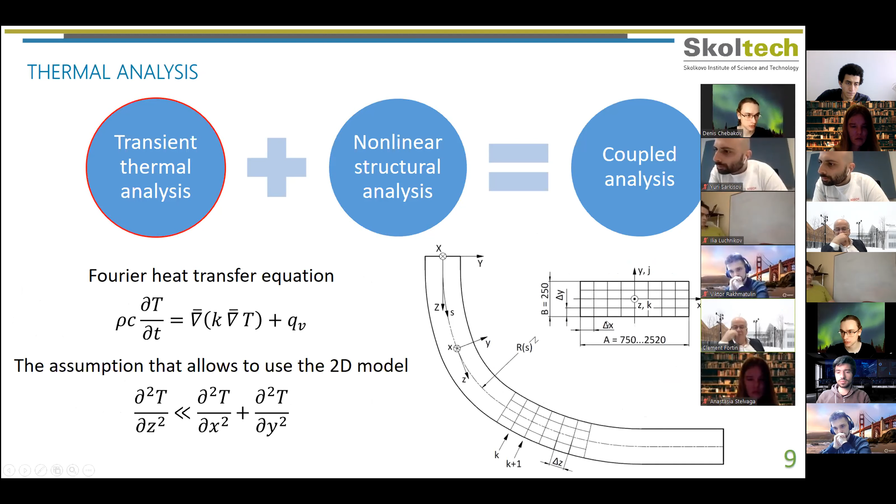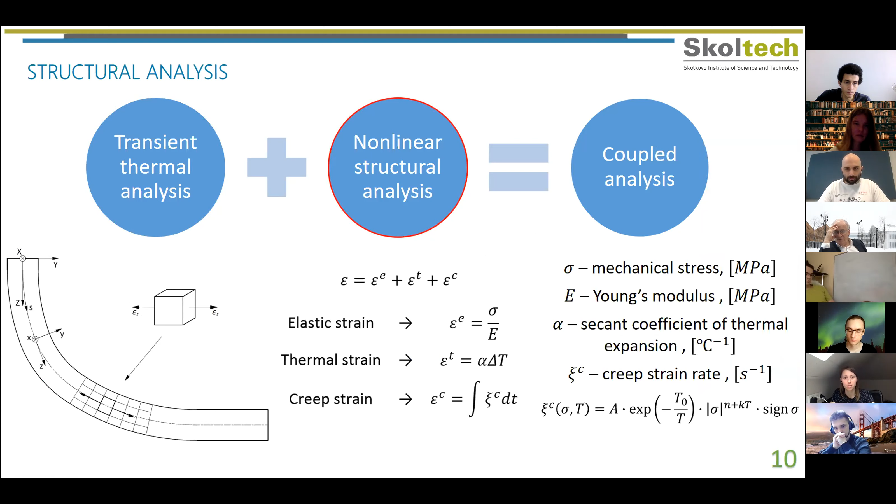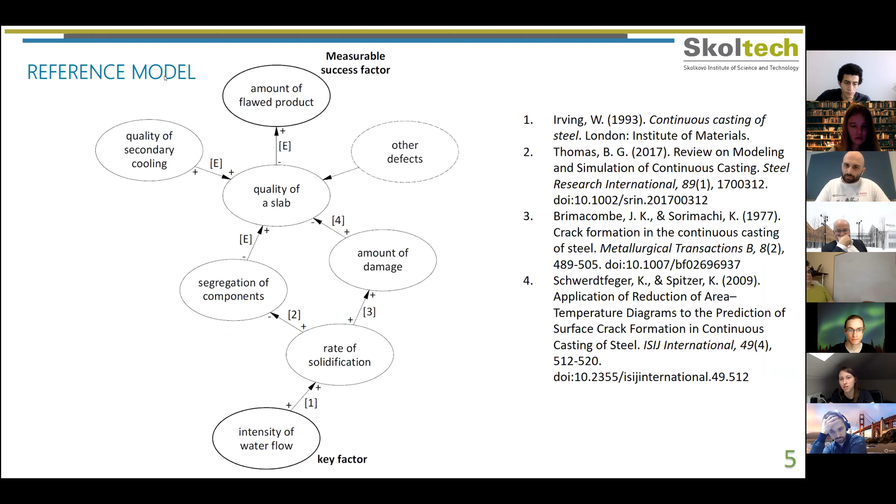And Denis, you don't mention the research gap. You focus on the industrial problem. You refer to some research papers, but then you don't mention the gap that is on the research side. We see the industrial problem with cracks and losses and so on, but can you find anything literature review wise that would indicate what is published? And maybe there's lots that's not published on this. I wouldn't be surprised. Did you find anything there?

Well, there is one big problem which affects the accuracy of the numerical model, which affects the control process. This one big problem is that the high temperature processes in steel are very hard to model and predict. They may be stochastic, and sometimes it's not possible to compute the process at all. So that's the big problem. And to be honest, it's very hard to solve it, if not impossible, I may say.

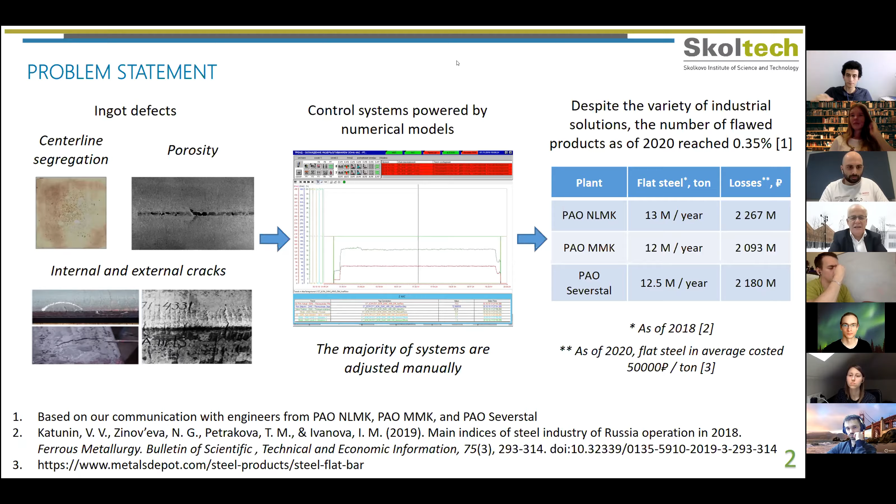Okay, good, all right, so that's it. Thank you, Dennis, good work. I like your research question and hypothesis, and your clarity was very good. Thank you. Okay, so Anastasia, next.